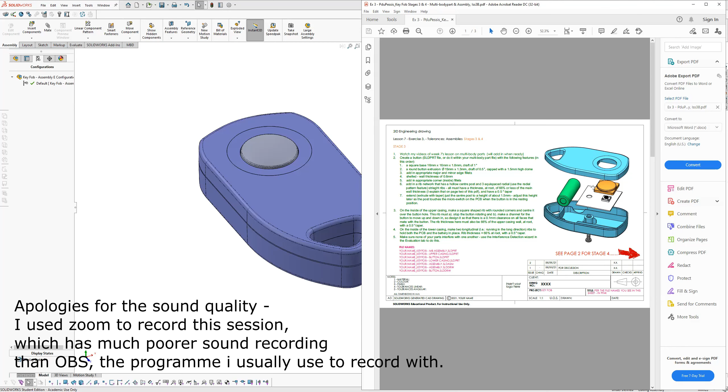Yeah, we haven't done the ribs that hold the battery yet. Okay, all right, so do you want to see that? Now let's deal with that, because let me just make sure I'm in the right place.

Just want to see if I can get rid of this thing. Does anyone know how to move this bar at the top? You guys can't see it, but it's my Zoom bar. There should be view options. You might be able to see it, and if you click on it, it should say hide video panel. That might help. Hide video panel, that didn't do it. Show video panel. Ah, okay, sorry. No, it's okay, there we go. Oh, well done, I did do it. Okay.

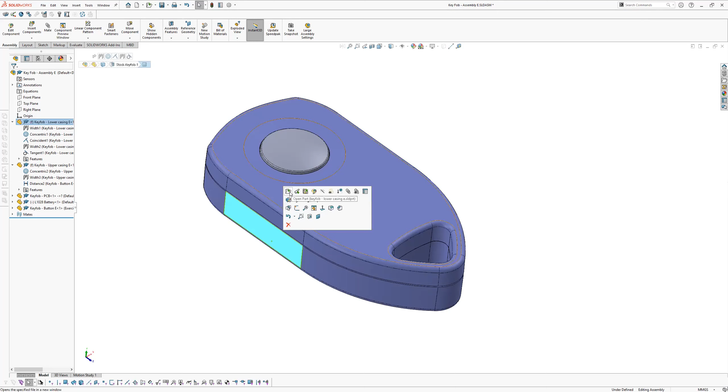Right, so I just want to make sure I'm in the right place. KeyFob assembly, right. I don't want to be in the multi-body parts, just because that will complicate matters. So I'm going to open this lower casing, and I've already got these two parts in place because I had them in place from the other one. So unfortunately, I'm going to have to go to the original KeyFob solid part.

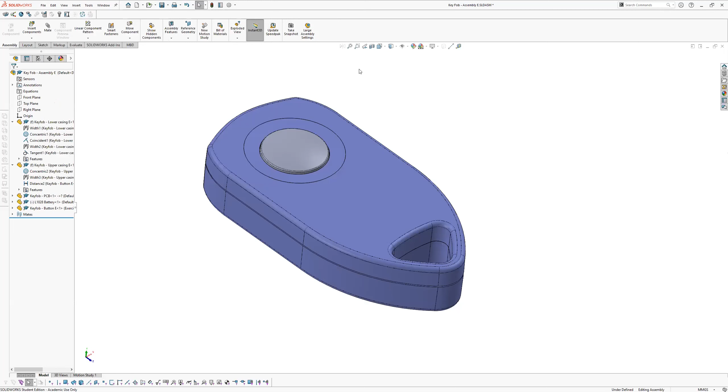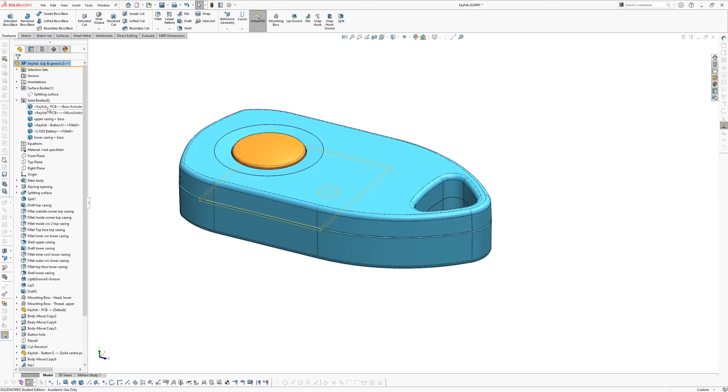Okay, and quickly see if I can't. Right, so I'm in the multi-body part. Those who might be struggling a little bit, maybe I didn't make clear that the bodies that are available to you will all be available under solid bodies. So whatever you've done to each body, you can access that body, and you can either isolate it or save it as a separate file. So that's as far as I've got on this one.

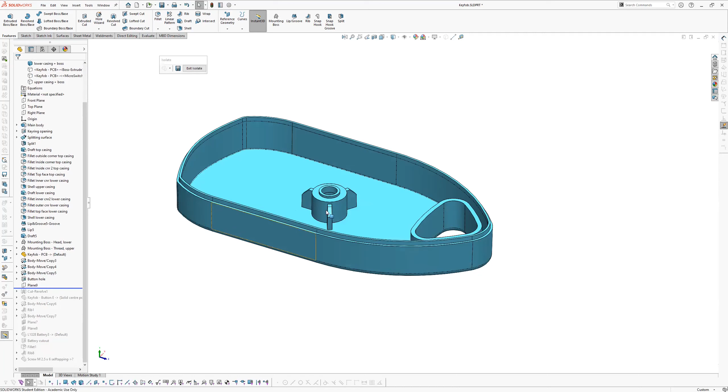I'm going to just quickly see if I can't. There you go, make those disappear. All right, so I forgot where we got to with ribs.

But let's, Phil, sorry, yeah, I think someone might be in the waiting room. Oh, okay, no, okay, Jake's just arrived. But someone's arrived, haven't they? Yeah, Jake has. Jake, Mr. Satna, how are you?

Nice. Okay, so let's quickly see if we can get this to disappear again. Ah, great.

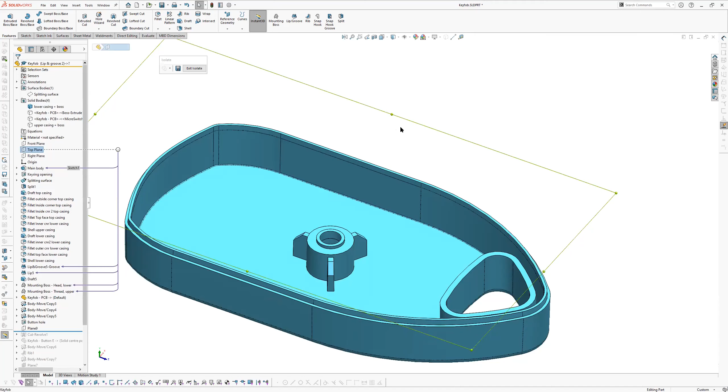So I want to create a rib. I'm going to start from, in this case, my top surface, which is my top plane, because I've got it in place already. Remember, you can select a plane, click Control, and you should be able to drag it down.

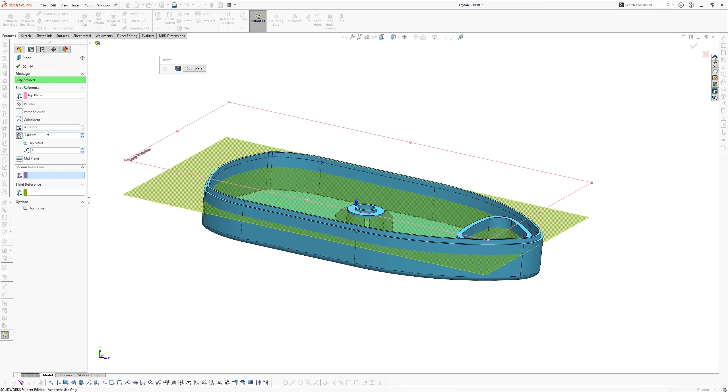So I can just drag an extra plane down and then decide what height I want that in. So let's make that 7. No, that's probably, let's see what 7 does. Okay, I can see straight away that 7 is not going to work, because you can see here that rib's going to be, well actually that's not bad, that's okay, it'll be all right. But you can actually see where, from the plane, it's going to intersect with other bits of your body.

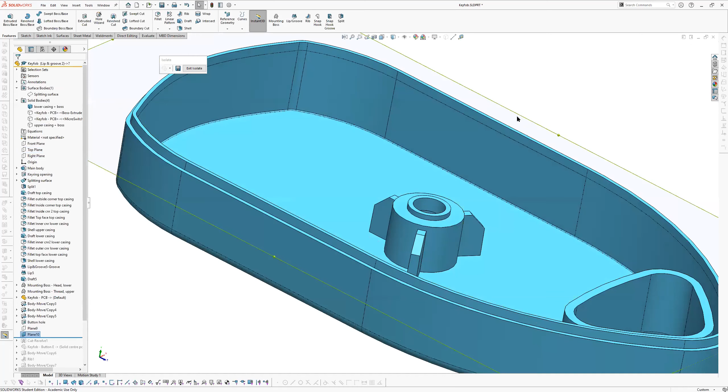So I'm going to leave it at that. I'm going to use that plane to make a sketch on. I can go to offset, bidirectional. I'll make that 11. Okay.

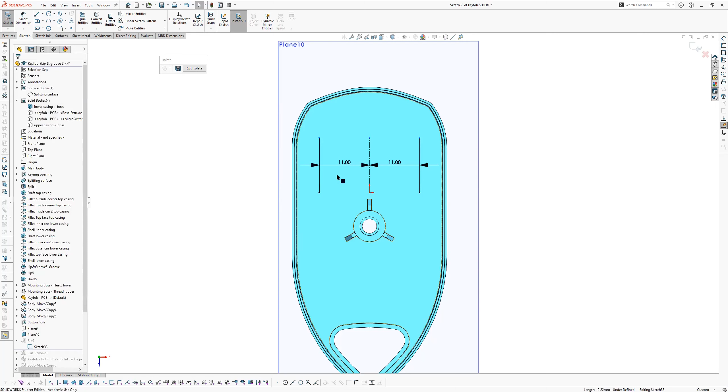So what I need to be careful of here is that these, if I extend them, are going to meet that wall like that, which isn't too much of a problem, but from a molding point of view isn't ideal. You actually want these ribs to help the flow of material inwards. So I'm going to put in an extra little line here.

Make that 19. Mirror this entity. I have to join these two. The error message for some reason. Go linear, accept that one.

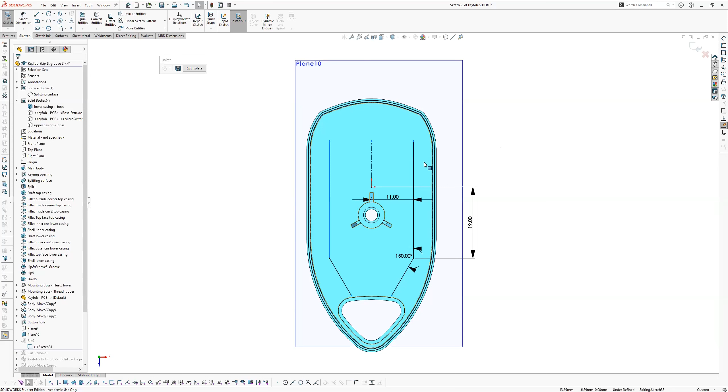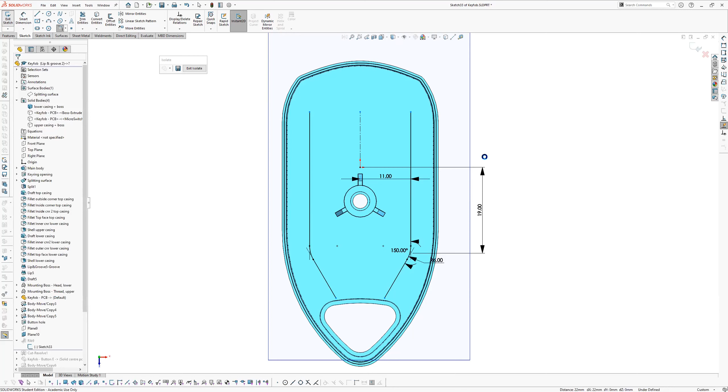Okay, because this is a rib, it's not ideal to put in radii afterwards. So this is the one instance where you in fact want to put the curves in on the sketch. I'm going to make it nice and large, maybe a bit smaller because it might interfere with the battery. So there my two ribs are.

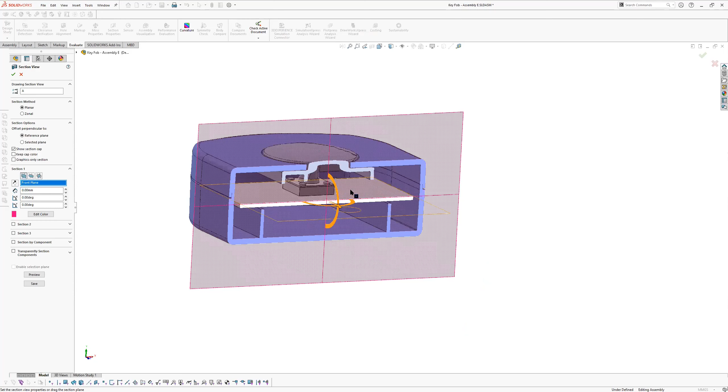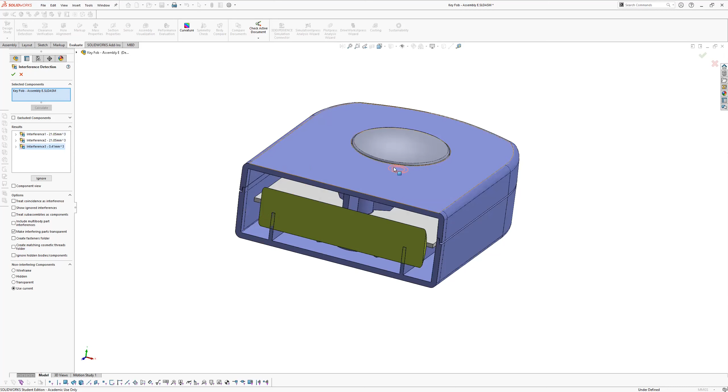If I go back to this one and change that, you can see that the battery is interfering with it. So let's go through this evaluate exercise again, and here you can see it shows where the interferences are. This is one thing you should do whenever you're doing an assembly of any sort: just establish that nothing is interfering, and if it is, that you know what to do about it.

Any questions so far? All okay.

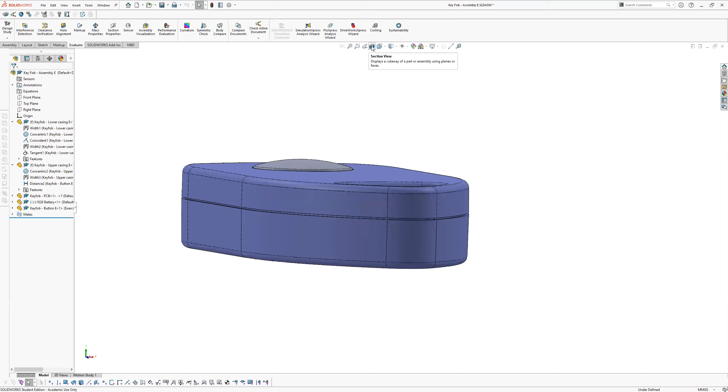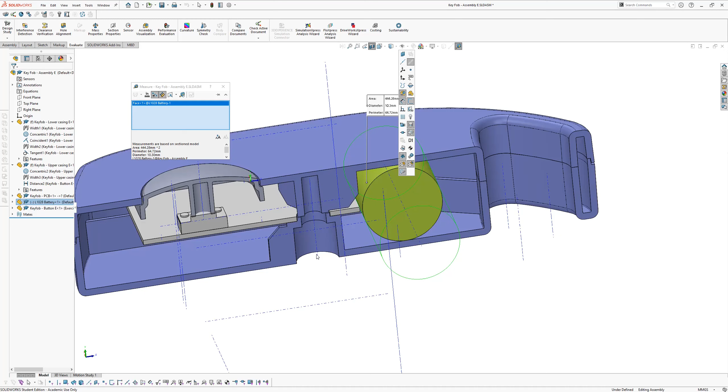I'm going to go back to my section view just to see what I need to do. It's not in the right place, but I should be able to measure from here to this temporary axis. You can see that's 7.42, which I can click in and control copy. Make sure I know what that diameter is.

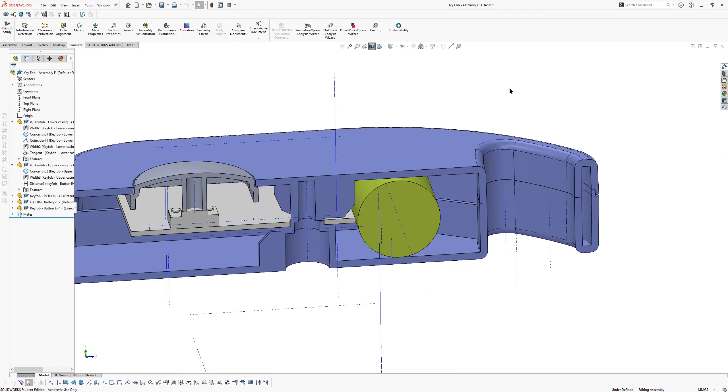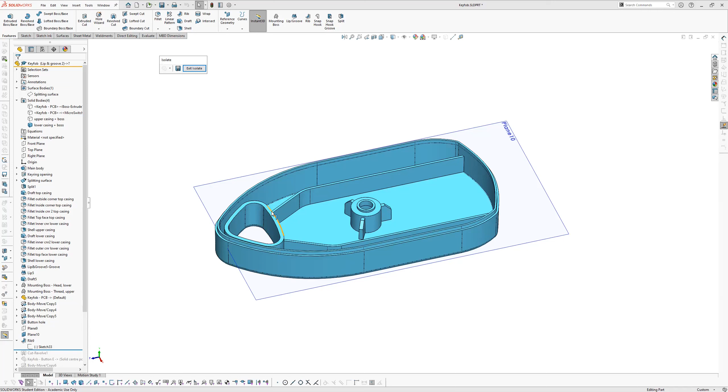I think it's diameter 10.3. So we're back to my—unfortunately, because I've done it in my multi-body part, I have to go back to doing it there. No, in fact, I don't. Let's make this easier, let's go to this one. Here I'm in the part which is in my assembly, but it's derived from the multi-body part. So I just need a cutout in this region.

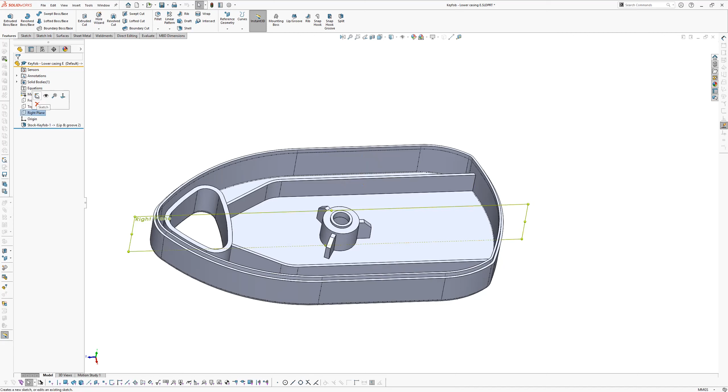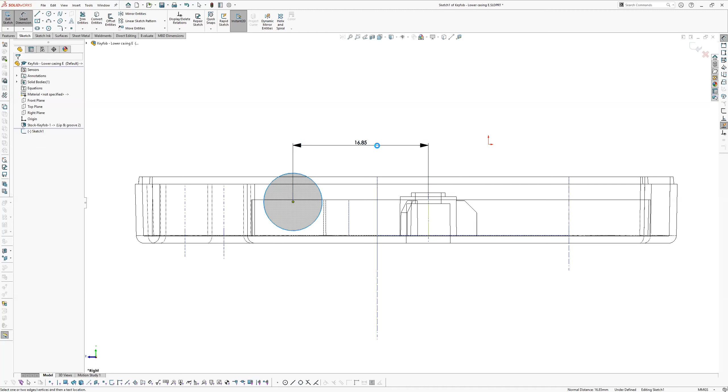I'm going to go to the right plane, put a sketch in, and I need visibility, so I'm going to click on this one, and then put a circle in around about here, and see if I can get hold of those—and I can. So I need to make sure that circle is here. I should be able to say Control V.

There we go, and that's the dimension that I copied from that original dimension. It's a neat way of making sure that you can bring things across. And that should be a diameter of 10.3—make it a bit bigger, 10.4. As you can see, it's going to interfere.

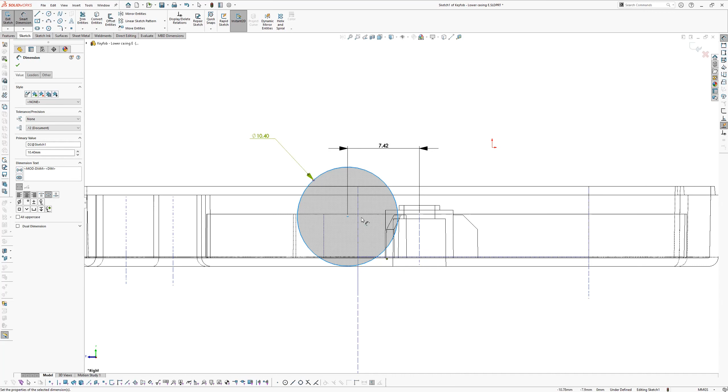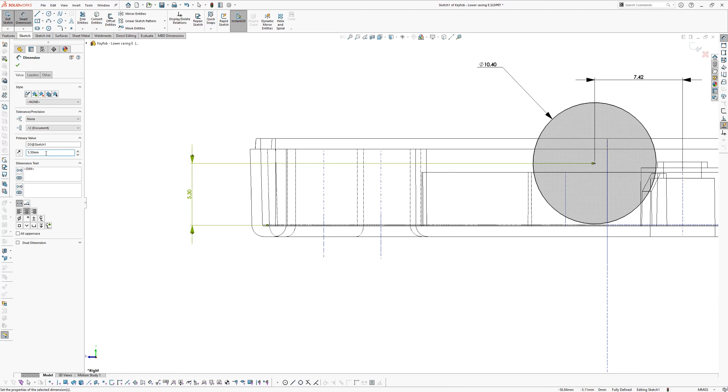So I need one more dimension, which is from that point to any point, but let's make it to the floor, if I can grab it. Make that 5 at 5. Too big. Yeah, that's all right, that'll do it.

Okay, so now I've got the basis for cutting this hole in the rib, which is fine on its own. But I want to put a bit of a taper on here, so I'm going to drag a tangent line out, and close this off.

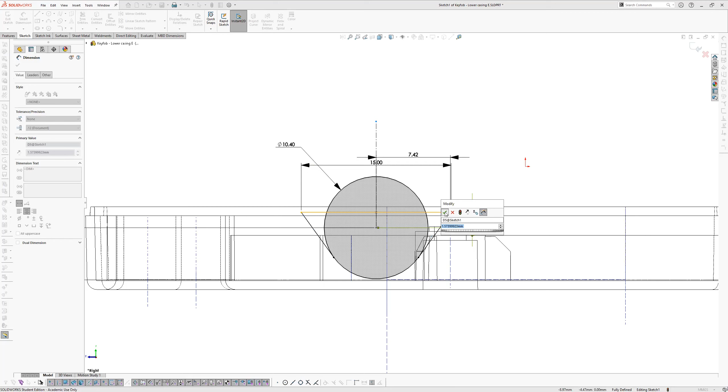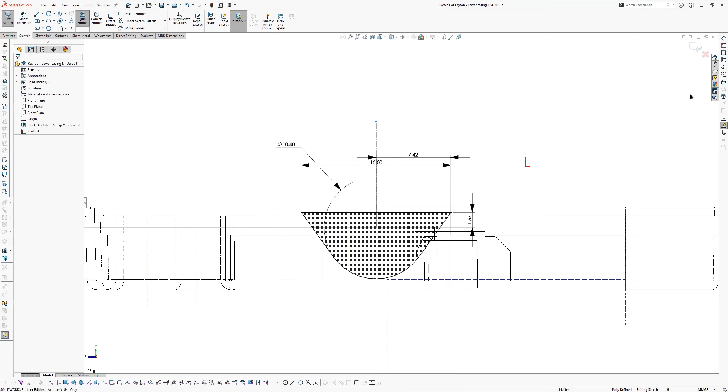And then that to there would be good enough. So I center my circle to the top of the line. I'm going to leave it as it is—I could leave it as is because I can still select regions, but I'm going to trim it a little bit. Right, and the moment it's trimmed so that it's suitable for use, it should go gray inside. So that's okay, I'm going to exit this.

Make my view visible. Right, so this is going to create a problem because this is going to, in fact, slice all the way through this piece here. So I need to go back and check what that dimension should be.

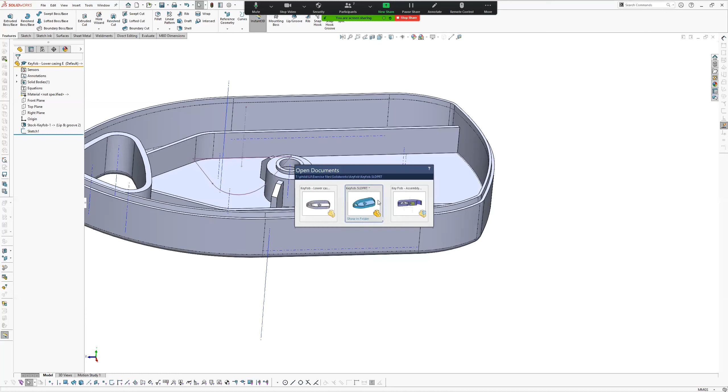Right, so I know what I did here. I calculated the distance between the edge of this circle and that axis, and I should be doing it between the two axes. So let's just do that again—between that axis and this axis is 11.5.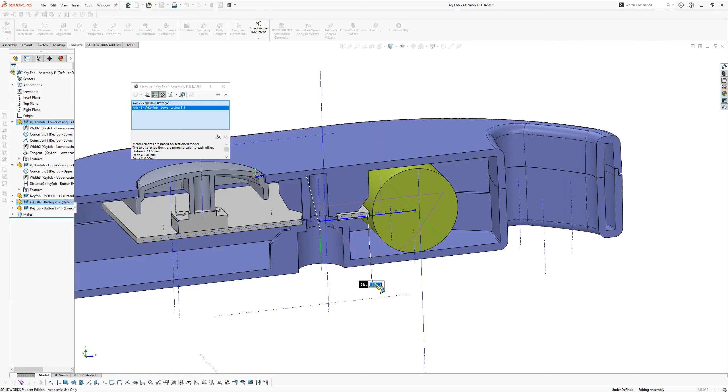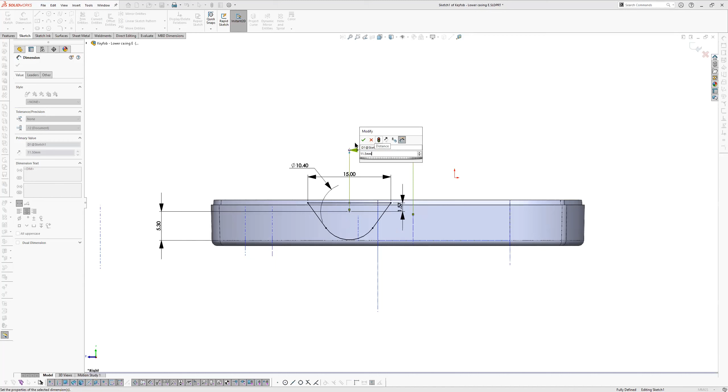So if I copy that, go across here, double click on this one, change that one, and let's just make this angle a little bit smaller because that might also be causing a problem.

Okay, now I can see it's not going to interfere with this piece, and it's going to slice out bits of my rib neatly. So I'm going to select the sketch, go to extrude cut, make sure that in direction one I say mid plane, and then I can either select a dimension, or I can go up to...

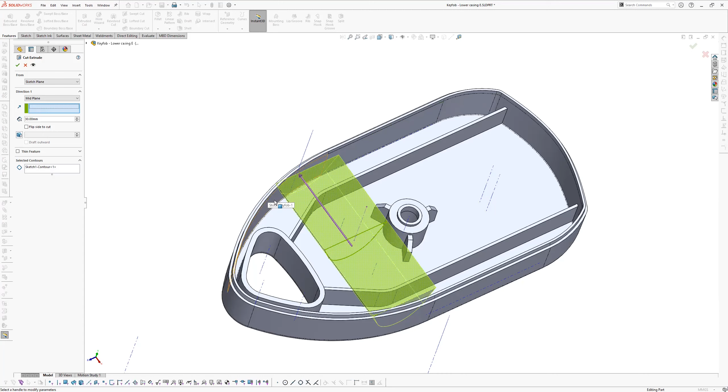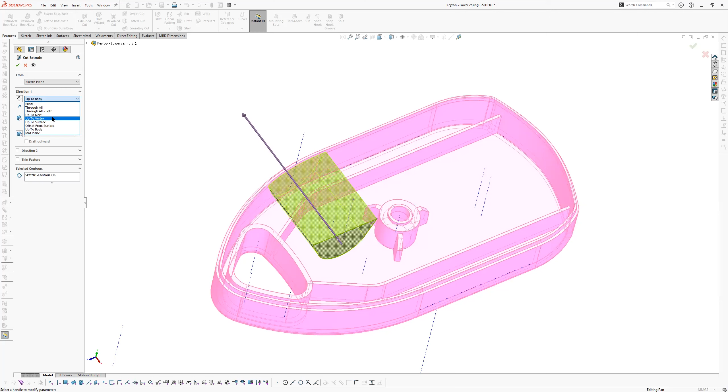Oh, won't do it. It should. Plane, from sketch plane. Oh, okay. In fact, I can just go to body. And if I do up to body, it looks like I'll only do one side, so I'll have to select the other side as well.

Yeah, it's sliced it out. And if I want to, I can now put in some fillets or chamfers. So, yeah.

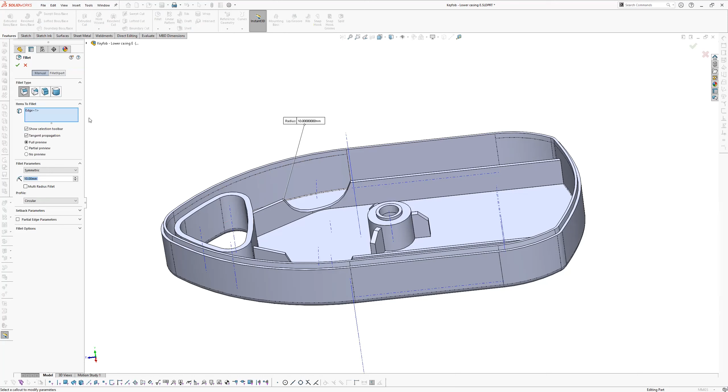Is there a way that in the assembly you could kind of use the battery to cut the rib rather than having to remake it? Not in the assembly, I don't think. That you could do in a multi-body part. You could... I don't think of the word... you could boolean one from the other.

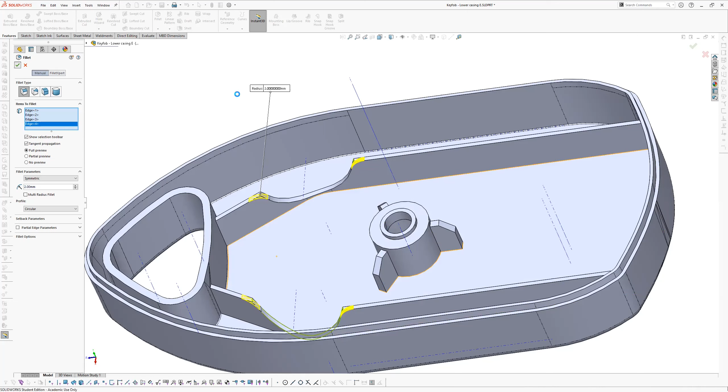Okay, like kind of as if you'd make a mold. Yes. Okay, so another great reason why I like multi-body parts is you can do things like that. But in assembly, as far as I know, you can't. I might be wrong. I'll check up on that and get back to you.

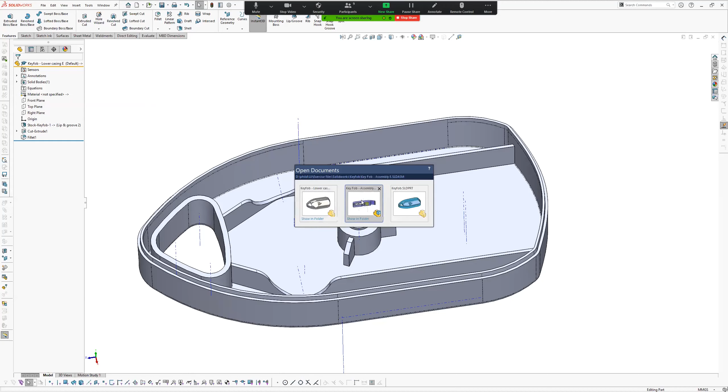Okay, so any questions about this so far? Let me save this. Hop across to my assembly. Do this evaluation again.

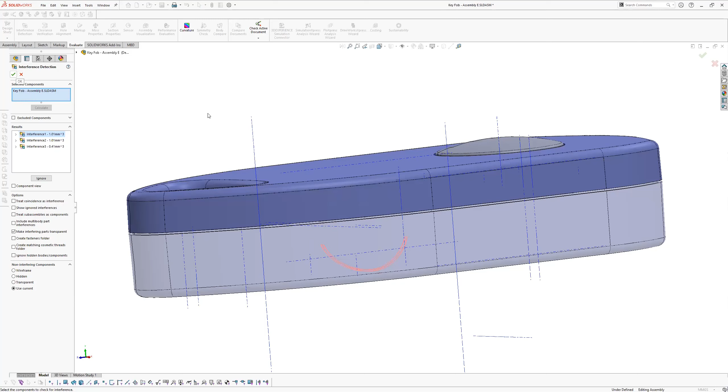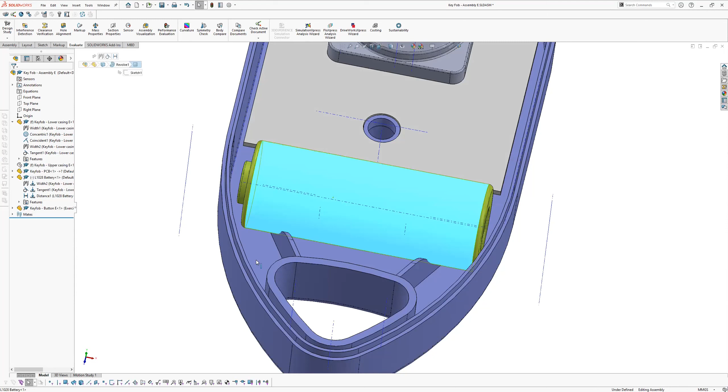So there's a little bit of an interference, and the reason for that isn't because I know what I'm doing, because I've done this before, not know what I'm doing, but because the way I've placed this battery is tangent to the bottom. So let's just hide this one. So I've actually placed this battery tangent to that face, so it is sitting a bit low.

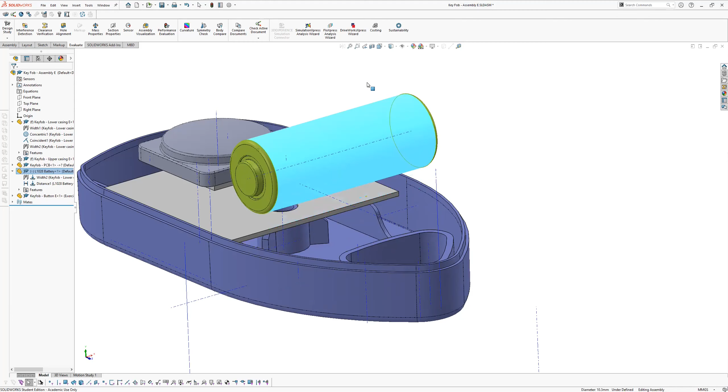So all I need to do is go delete that one. All right, so we've only got 10 minutes left. And now I should be able to pull this up and just hit one of these edges. And I should... no, that's not going to do it.

The reason for not being able to connect them now is that I've made this face here slightly larger than the battery because that's what it needs to be. Otherwise the battery is not going to fit nicely. So I'm going to go back to that tangent one.

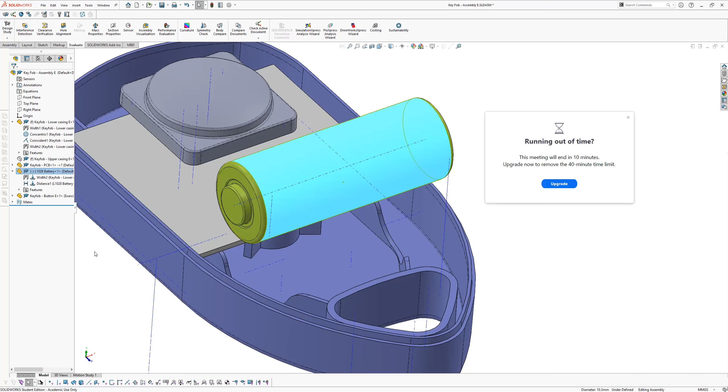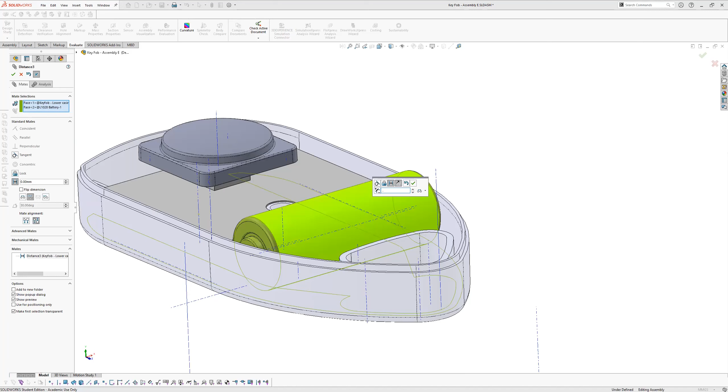And I'm going to go back to that one. I should now be able to put in a dimension. So I'm going to put that distance there as 0.3. So you see it's rising up a little bit.

Okay, and if we now do an interference calculation, the only one that's problematic, as you can see now, is this little button interfering with the boss. And that's easy to fix because I can just go into that boss feature even inside my assembly.

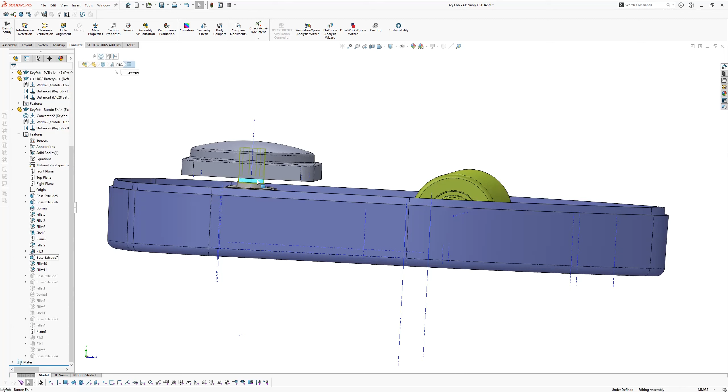And there's that dimension, and I can just alter that. Say 0.8. Rebuild. And you can see there's a little bit of a gap now.

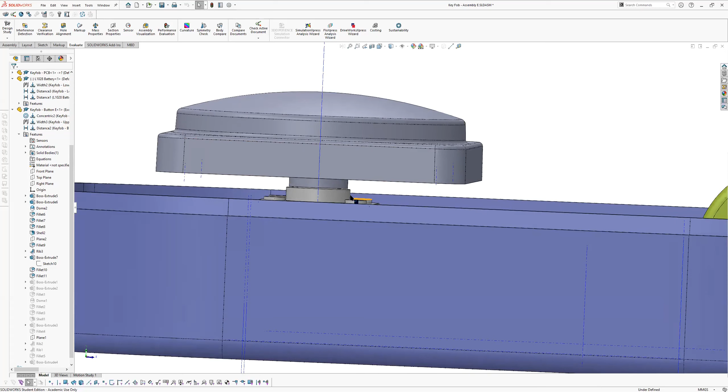So I want this to touch exactly as I've asked. I'd go and measure those two. I'd go and say, what's the distance between that and that? And it's 0.2. So I can go back to this feature.

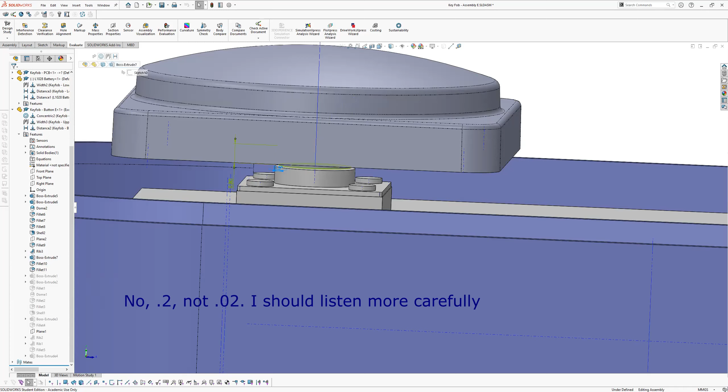0.2. So those two are... well, not quite. All right, but you get the idea. That's close enough for what we're doing at the moment.

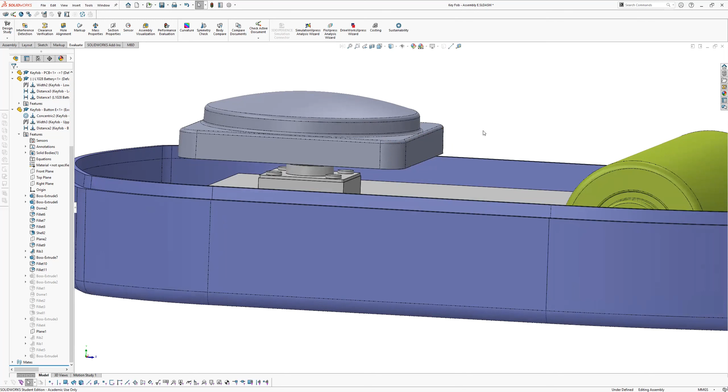10 minutes left. Is there anything that you guys want to ask before I carry on? Before I try and remember where I need to go next. I know where.

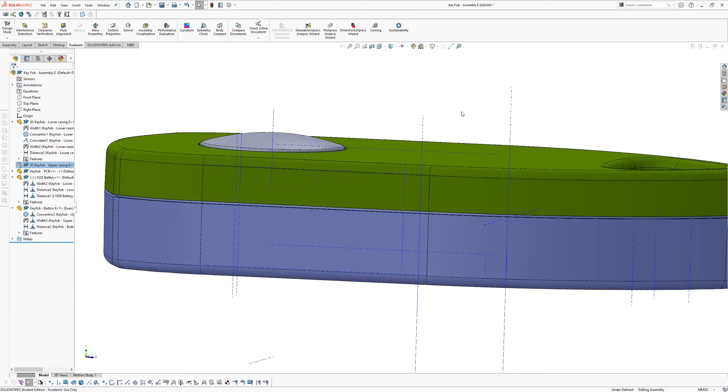I'm sure you already know how to do exploded views. Is that a yes or a no? Is there someone who wants to tell me? We have done them. Do you need a refresher at all?

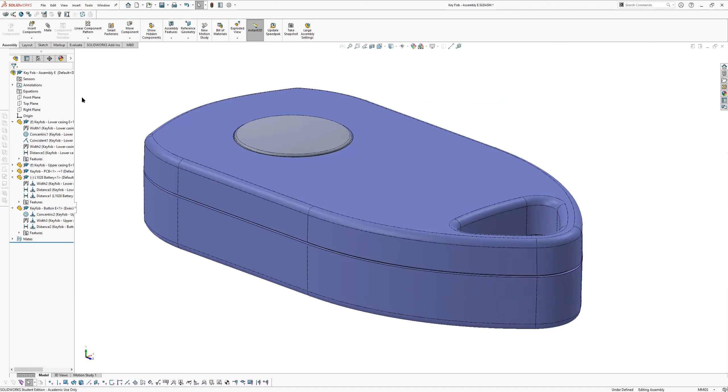I don't think so. Can I ask you a question though about exploded views? Sure. Because currently the options are either kind of 90 degrees or radial. Is there a way that you could change the line in which they explode?